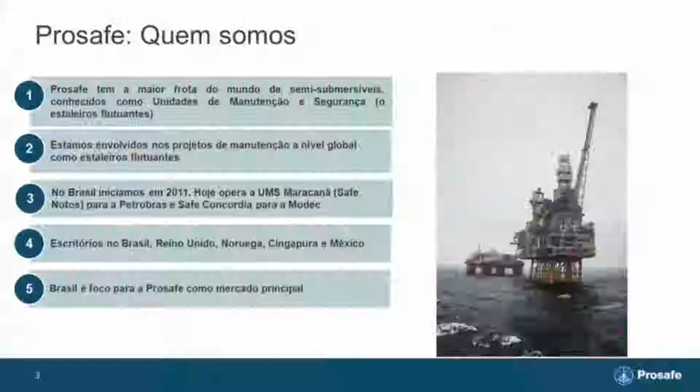A nossa frota tem mais ou menos 6 unidades nossas, praticamente novas, e aplicaremos. As 6 unidades têm presença aqui no Brasil e no Mar do Norte. Aqui no Brasil temos Safe Notos operando para Petrobras e Safe Concórdia para Modec aqui no Brasil.

Olhando o mercado global, temos mercados primeiros ou principais, Inglaterra e Noruega, e também olhamos o Brasil como um dos mercados principais. Além disso, México tem uma importância para nosso mercado. Espontaneamente também a Austrália tem demandas.

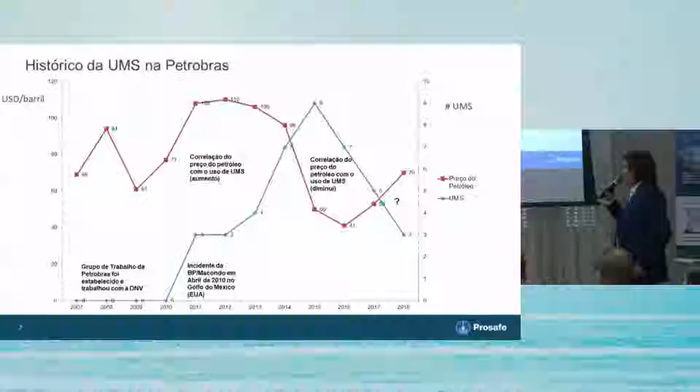E interessante é que a correlação entre o preço do petróleo e o uso de UMS está bastante consistente entre 2011 e o ano 2017, 2018. Agora temos uma reação um pouco atrasada de uso de UMS no Brasil.

Petrobras tem feito uma evolução da ET, da especificação técnica de UMS, e os requisitos que se demanda da Petrobras. Hoje em dia, se exige um semissubmersível com guindaste de 100 toneladas, espaço de convés de 1.500 metros quadrados, DP3 e 6 thrusters, 6 geradores para elevar a redundância da unidade. O resultado é que 100% da conectividade, 100% do tempo a unidade pode ficar conectada e também resulta em melhor segurança no mar.

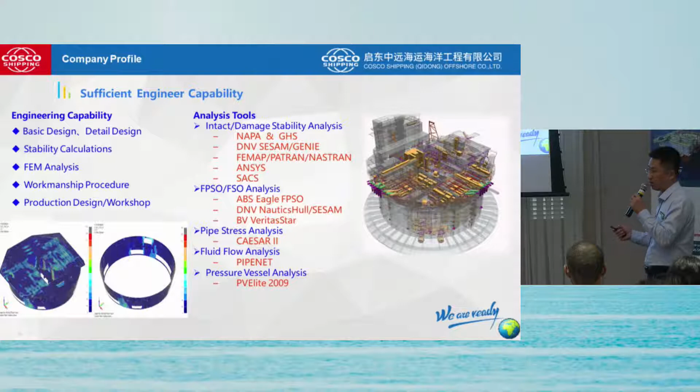From the project management side, we can provide from contract award until delivery. This includes HSE, QAQC, risk management, contract cost control, etc., until delivery, including commissioning, procurement, construction, etc. This is also supported by the experienced engineer team and qualified inspectors, who are independent during the inspection. We also have approved skilled workers, qualified by DNV, ABS, etc.

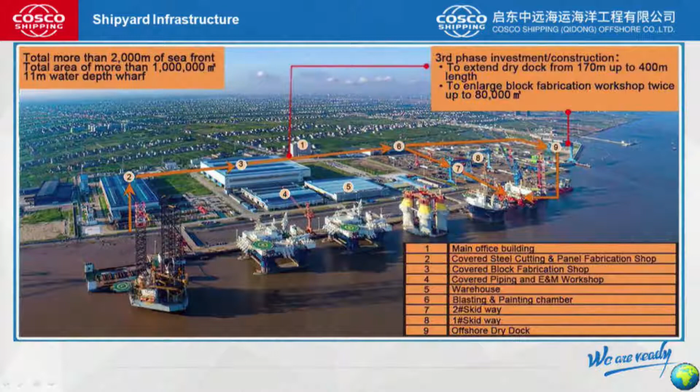If conditions permit, then we will directly erect the unit in the dry dock. Here is the dry dock, and this dry dock is very suitable for the UMS. The width is 120 meters and the length is 170 meters - it's almost a square.

Part 3 of my presentation will show you our track records, supported by the previously mentioned information about engineering, HSE, QAQC, and our infrastructure.

Our core business is offshore new building and modular fabrication integration. We started in the offshore marine repair and conversion business 40 years ago.

Supported by engineering, technical, HSE and QC sectors, our products cover almost the entire range of the offshore market, from shallow water to ultra deep water. We can build various kinds of drilling units, including semi-submersibles and jackup units, as well as FPSOs, FPUs, and shuttle tankers.

This side is for production, and this side is for offshore engineering. We can build heavy lift vessels, UMS (what we call accommodation units), drilling tenders, pipeline vessels, and PSVs. Recently, the market hot point is windmill installation vessels, and we have 3 projects under progress.

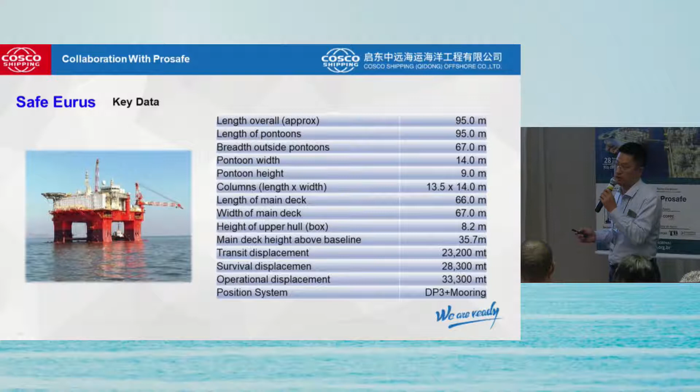Now for Eurus. The following slides give an introduction to the construction progress of Eurus. Here is the key data for Eurus, as mentioned it's equipped with a positioning system of DP3 plus an 8-point mooring system, so it can operate with very high efficiency.

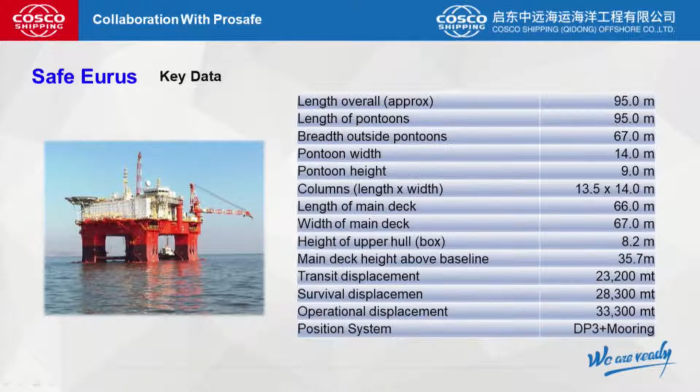It has 500 POB capability in the accommodation area, with single person rooms and double person rooms. These are some pictures after it was built, and some newer pictures. Each room has a window, giving direct light access to the room.

During construction, detail design, and shop design, we worked together with ProSafe to optimize the design of the machinery areas, giving as much space as possible for future maintenance.

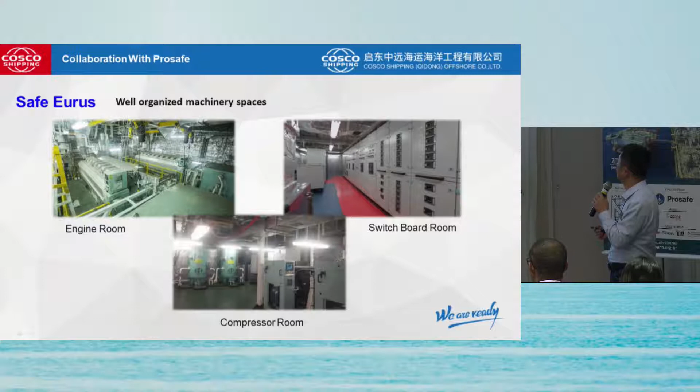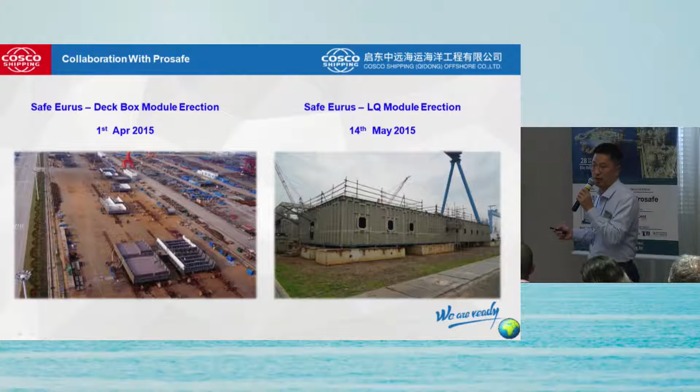In the following several months, we started the keel laying. In the meantime, we began fabricating the other parts of the unit, like the accommodation modules, living quarter modules, and the deck box, especially used for the mechanical machinery room and the engine rooms.

In July 2015, almost a year later, we skidded out the unit. The major construction method is that we build the pontoon on the skidway, along with part of the columns, and connect them with bracing.

When all this was completed, we skidded from the skidway out into our semi-submersible launching barge, which has a lifting capacity of 12,000 tons. This is our semi-submersible launching barge. Three days later, we moved the launching barge into the center of the river, and the barge floated under the unit. This unit floats over with the pontoons and part of the columns, connected with bracing.

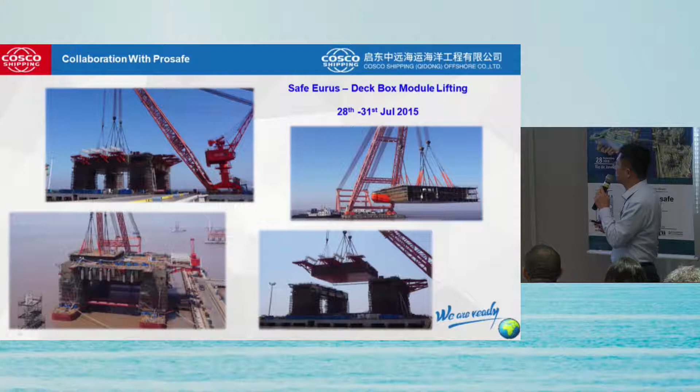In parallel, we completed the construction of the deck box and the living quarters. After that, we installed the remaining part of the pontoon, the column, and the prefabricated deck box. This is the unit after installing the deck box.

The next step is we go into the dry dock after installing the whole deck box. During this period we install the living quarters to accommodate 500 persons.

Then we come out of the dock for pre-commissioning and further detailed commissioning, with the living quarters on board.

The second docking is mainly for continuous commissioning of various systems and also for painting the hull, which brings us to April 2016.

After the second docking, we go out for thruster installation, followed by the sea trial and other tests for the whole unit.

By September 26, we achieved the technical acceptance of Safe Eurus, meaning it is now ready for delivery. So this is the typical construction progress of the Safe Eurus.

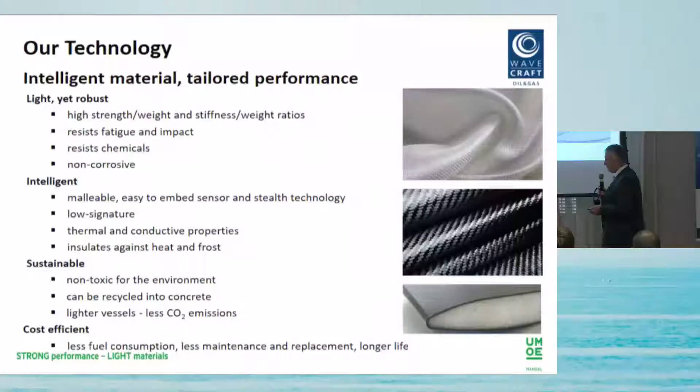Not only that, but it has a very low signature, and the vessels we are building for the military are also stealth vessels. So that is a different technology and a different need, and we don't have that in the offshore wind or oil and gas sector.

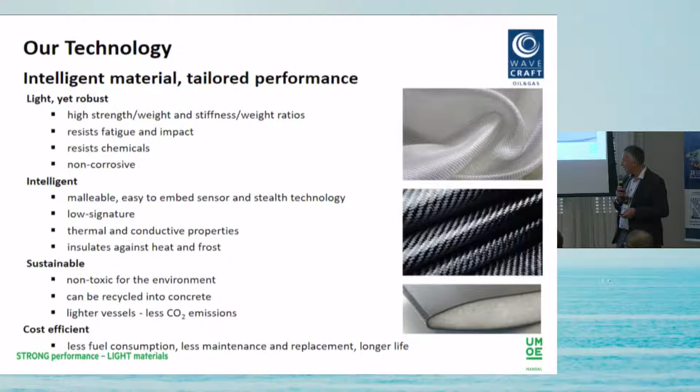Also, the beauty with this is that since we are lifting it up off the water, nearly like a hovercraft, we don't have much resistance, so we have much less fuel consumption compared to other ships.

Okay, I'll try to show this. Do you have to start it?

Okay, so this is the shipyard. We are in Norway, part of Norway. This is, we believe, still the fastest warship in the world, built 10-15 years ago.

And then, as I mentioned, we moved into the offshore wind market, mainly for the reason that we are able to heave compensate the whole vessel, and we are able to transfer people in a safe way.

Here you can see what we are doing. We are pushing towards the windmill, and then when the wave wants to lift the vessel, we just let the air out, and then we will not be moving up and down while people are climbing the ladder.

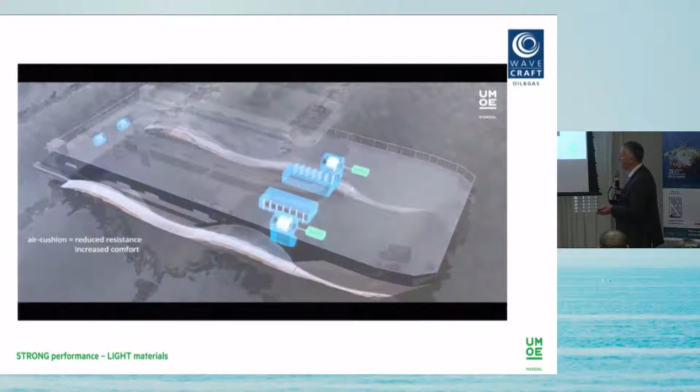This is a bit how it works. We take about 80% of the weight of the vessel and lift that out of the water. So the draft on this vessel, when it is lifted up, is about 80 centimeters. We then fill this space here with air, and we control that.

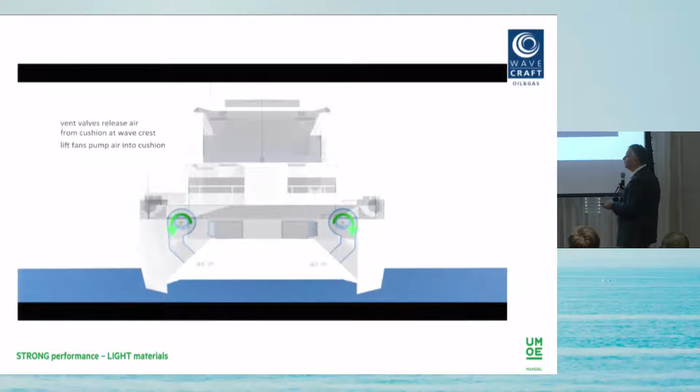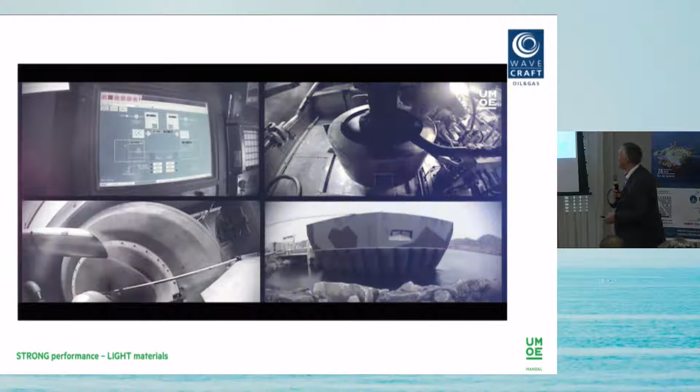As soon as we have a lift on the vessel, we just let the air out. When the vessel is coming down again, when the wave disappears, we will fill the empty space with air. That is done like 15 times per second, so it works extremely well. And this is just some videos.

So the normal draft on this vessel is about 3 meters when it's off cushion, and when it's on cushion, it is 80 centimeters.

Okay, so what we call it is SES technology. It is a combination of a hovercraft and a catamaran, and the beauty with that is that we are taking the best of both technologies. It is like a hovercraft that will slide around, and this one will just act like a catamaran.

We do lift, 80% of the vessel is lifted by this cushion, so we have extreme slim hulls to reduce the resistance. And then we control, we have a lot of capacity of air filling up this space underneath here.

By doing that, we have these vents or dampers that will let out the air, and as I mentioned before, that is happening 15 times per second, so we are able to control the motion of the ship.

Not only that, but we are also able to decide where we want to optimize the heave compensation. Do we want to optimize it at the bow, or at the center of gravity, or where the people are sitting? That just is to make the comfort better. The reason we can do that is because the center of gravity on the vessel is in a different place from the lift of the cushion, so we are able to play with that as well.

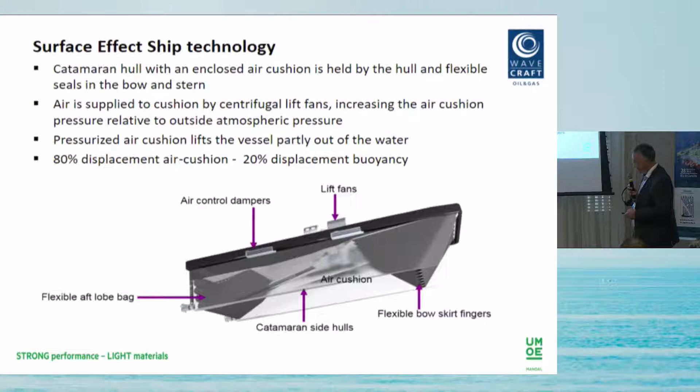Okay, if you could start this one, please.

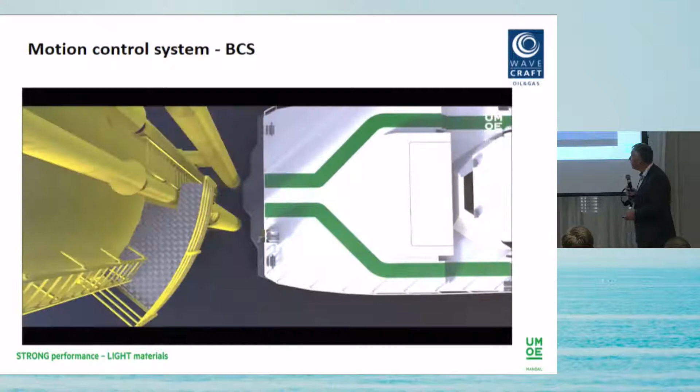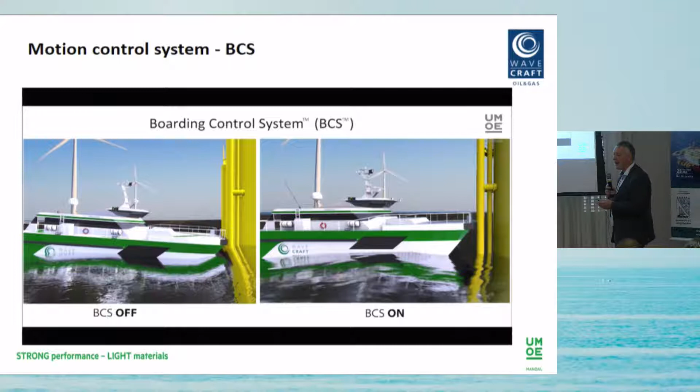This is showing the wind market, since we started there before moving to oil and gas, which is what they asked us to do. This shows how the vessel would behave if you are just pushing toward the windmill. When we have the boarding control system on, we're able to fill the empty space when the vessel wants to drop, and when it wants to lift, we let the air out.

A bit about the benefits of using the SES technology. It's high speed with great fuel economy. These vessels do about 50 knots, and military ships go even faster. We have good control of what it takes to make a vessel go so fast. Some of the wind market ships do about 45 knots, so it depends on what the client is asking for.

High comfort, we think it's important. I was offshore myself for 16 years, flying with helicopters but also commuting with boats with friends. I think the key to convince people to start using a ship again is to give them high comfort, and you don't want them to spend too long on a ship. So we think high speed is important too.

When you're riding on an air cushion, that acts as a shock absorber. So when the vessel wants to fall down, it will dampen the movement, and the acceleration on the body is what gives you sickness - that's the heave. What we see is that we don't get much seasickness on these vessels, because it's a much slower movement, like riding on a soft cushion all the way.

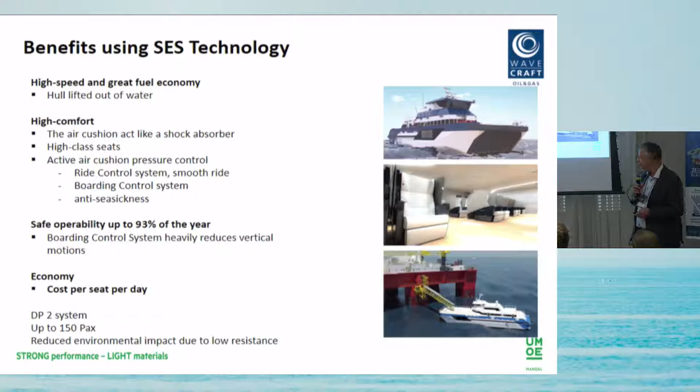I'll talk a bit about the cost for this vessel that can carry 150 people. It has a DP2 system, and reduced environmental impact due to low resistance, so we don't burn much fuel - I'll show you more about that.

This is how it works. What I'm showing here is when the boarding control system is off versus on. On top is the acceleration on the bow, which we measure. As soon as we turn it on - in this graph it was set to take 70% of the dampening on the bow and 30% on the center of gravity - you can see how the system performs.

The vent valve position shown here indicates when they are off, and then when they start working to compensate the whole vessel.

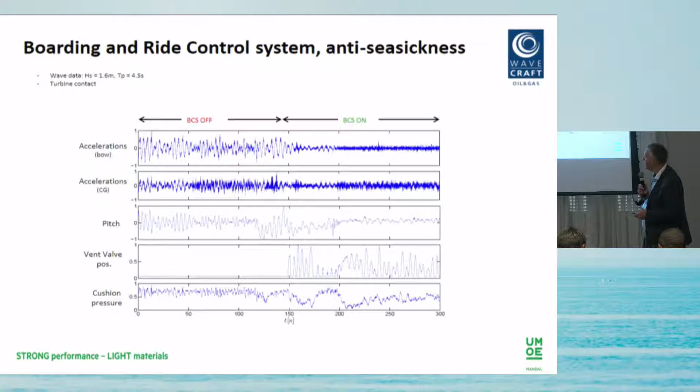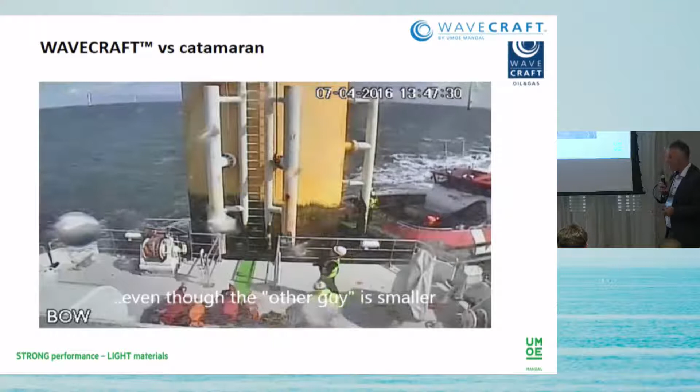This shows a catamaran, maybe a bit unfair since it's smaller than our boat, but as you can see it's moving quite a lot compared to us, while we sit here adjusting the movement on the ship, heave compensating the vessel. It gives you a picture of how it works.

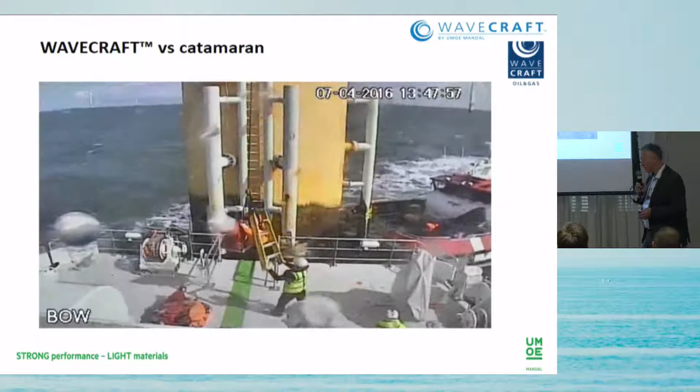Is it fair to this other guy? I'm not sure, but at least it shows you how this system works, and it is quite good.

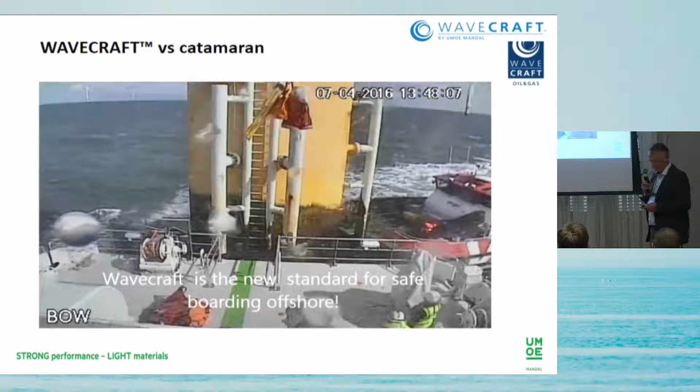Seasickness. When we started to build it, we were asked to find a safe way to transfer people to the windmill, and seasickness wasn't so much thought about in the beginning. We did experience hardly any seasickness from the crew on board the vessel.

So then we started to measure the vessel, and after a while we thought it was so good that we asked a third party to measure the vessel, and they did that for 3 months. There's an ISO diagram for when people get seasick. I don't know if anybody here has been offshore, so I'm not sure if you agree with that ISO diagram, but it is an ISO standard.

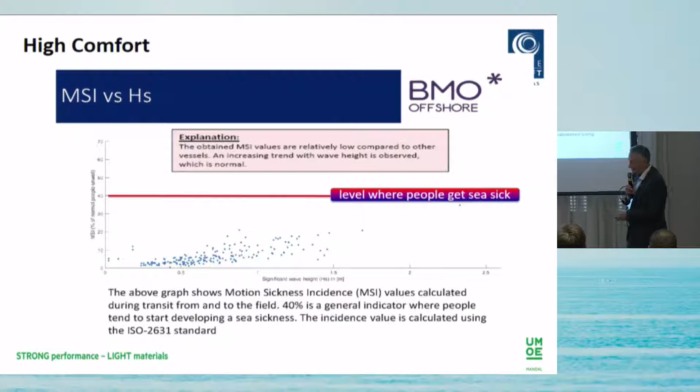What we see here is this point, that was the recording, and this is really when people start to get seasick. So what we saw is that we were far below this standard for when people start to get seasick. So again, comfort.

So what you see here is quite cost efficient for the end buyer of this vessel, for the oil companies, that we don't spend much fuel on this. And of course, if you have a long contract, it will save a lot of money on fuel with this concept.

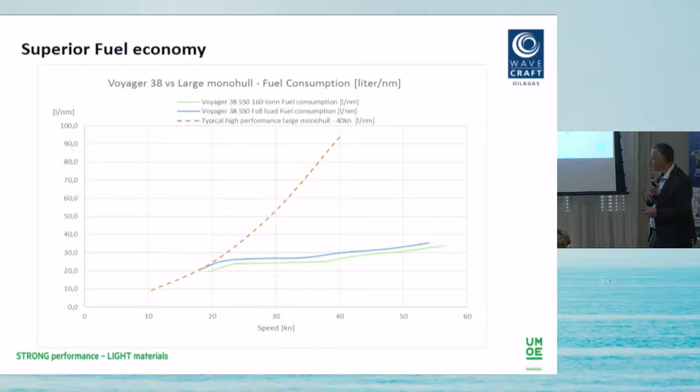What we did, we took the numbers from the offshore wind market because it seems like they are a bit more developed than the oil and gas market for transferring people on smaller fast vessels. So we took the numbers for what we were allowed to do. We said we were allowed a vertical acceleration of 1.15 G.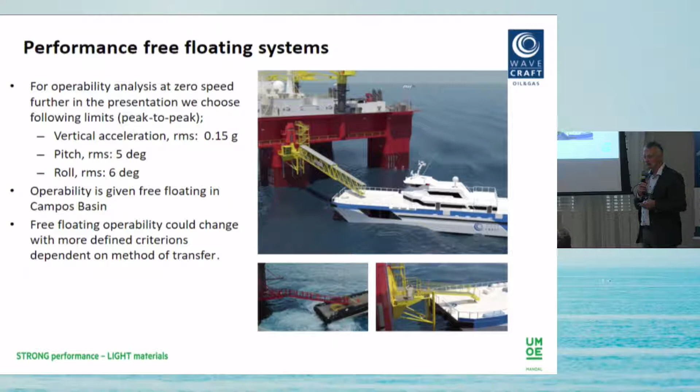Then we said we will allow pitch up to 5 degrees, peak to peak, and roll of 6 degrees, peak to peak. Then we went to the Campos Basin to analyze the scatter diagram. What is the performance of this vessel? How much operability can we get?

We also looked at how this vessel would compare to a flotel. Because we can regulate the vessel against what we are pushing against, we saw that we were able to more or less follow the flotel all the way when it is moving, except for 65 centimeters that we have to take up with the gangway - that's the residual movement we're not able to take.

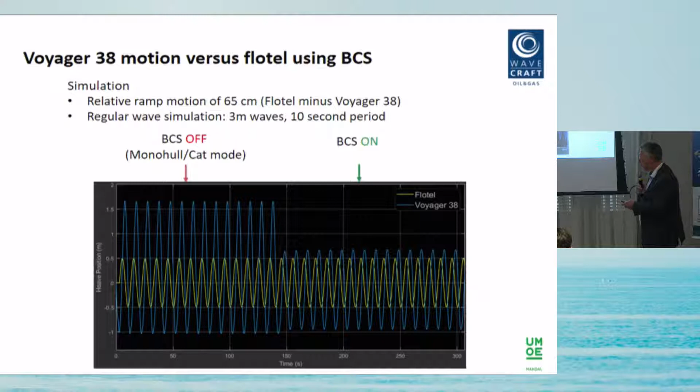We also looked at an FPSO. What you can see here is the blue curve, that's us, the blue curve is the Voyager, our vessel, and the FPSO is the yellow one. We're nearly able to follow that as well, even though that's a really big ship. Of course, as it moves, we follow the wave and regulate the vessel's motion in accordance with the FPSO.

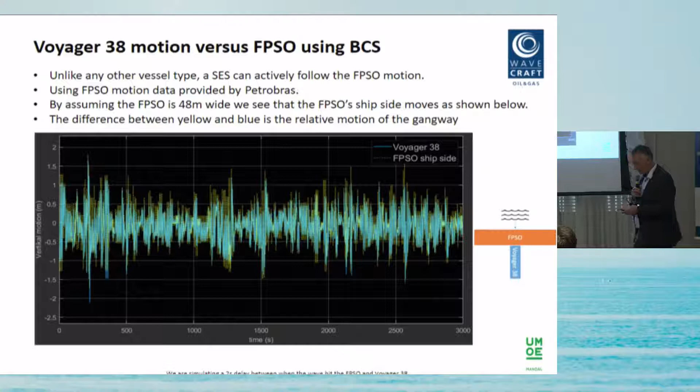Okay, this is the scatter diagram from Campos Basin. What we saw is if we have a gangway like this, where we just land it on the front deck of the vessel, we're then sitting on DP2. We see that for a full year, with the criteria we set for ourselves - peak to peak 6 degrees - we're able to operate the vessel 92% of the time.

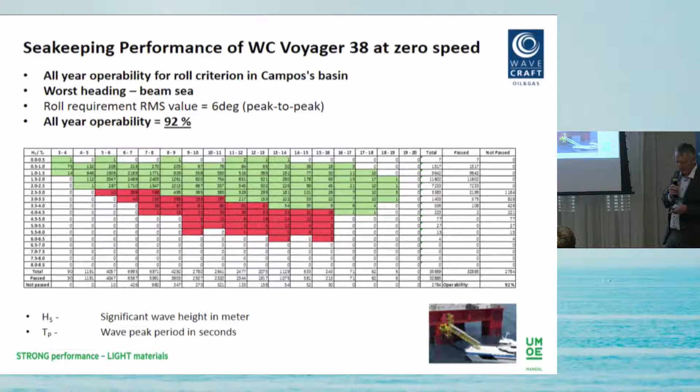If we use a different system, as they use in the offshore wind market, we get an extra force, and we are able to operate the vessel in the same area 94% of the year. So I think the operability is quite good, and it's proven that this active heave compensation we have on the hull is quite good.

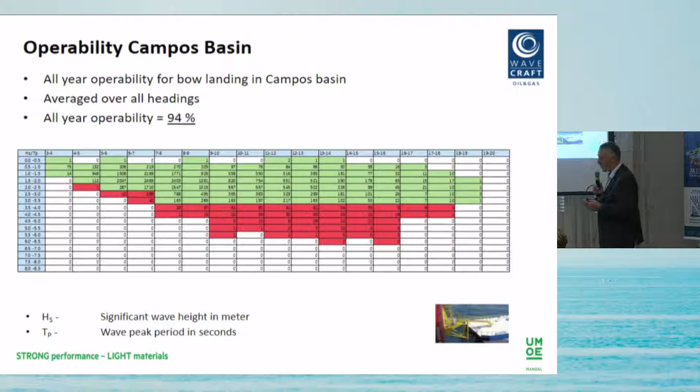What we are also doing, this is still on the drawing board, we are doing a lot of research and development on these systems. We have integrated a gangway in the center of the ship to accommodate the flotels, because they said they had a reach of 16 or 18 meters. We've put the gangway on a pedestal that we can extend, so it's hidden when doing 50 knots, and when alongside, we lift it up, swing it around, and push it. I'll show you a drawing about that.

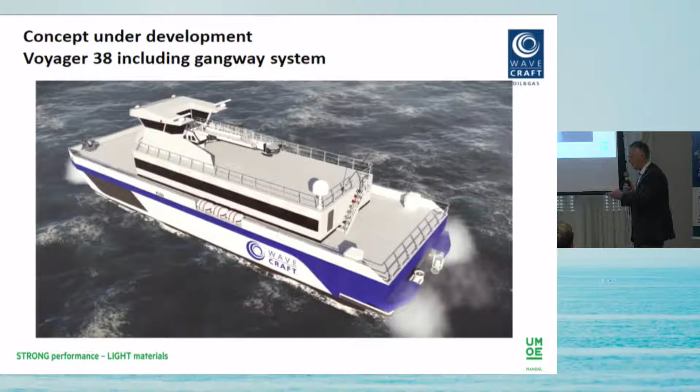So this is how we see we can do that. We've been told they have a landing area in this area, so we should be able to reach that far up. We also have a gangway system at the back, which will have a reach of 6, 7, 8 meters from sea level.

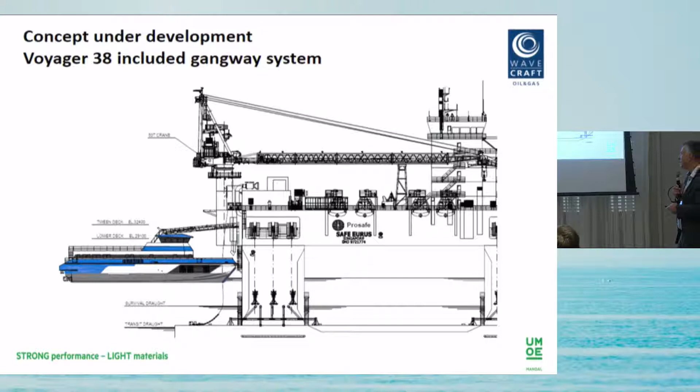Okay, that's a bit about comfort, that's what you can get. We are a shipyard, and we can give you almost anything you ask for, and we'll put it in there. But of course, if it's too heavy, we will advise you to keep it as light as possible.

So this is why we believe that the future logistics of personnel will move from helicopters towards a ship, because we think we now have a ship that is able to have a competitive speed towards a helicopter. We think it's quite comfortable, not only for seasickness, but also a good way to transfer people between the vessels and our boat. If you go to wavecraft.no, you will find a lot of information about what we do, the performance of the vessel, how we transfer people, speed, everything. You're free to go there and see whatever you want, there's a lot of information there.

And that's it, I'll just show you one thing. This is the material we are building the ship in. It's carbon fiber, extremely light and extremely tough. And the military also like it because it's stealth. Okay, thank you very much.